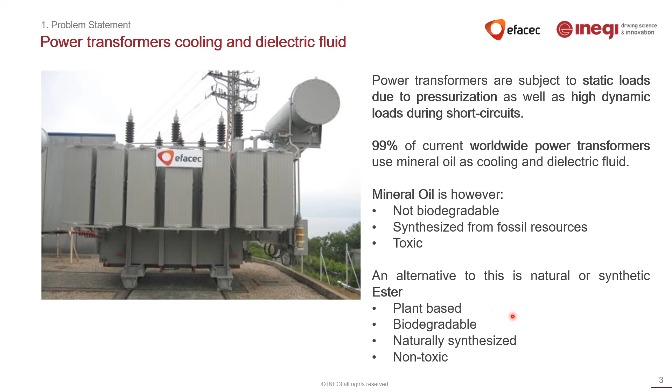So if we want to go forward to a more environmentally conscious equipment and more eco-efficient, it would be a good starting point to come up with an alternative to this dielectric and cooling fluid. And one such alternative is the natural or synthetic ester, which may be plant-based, biodegradable, and is naturally synthesized, as well as non-toxic.

Besides the environmental concern, there's also the point of view of safety, namely fire safety. Since mineral oil has a much lower flash point than natural ester, when we are employing a power transformer to a densely populated location, or even in a sensitive location, as we are aware there were this year a lot of fires in Europe and as well in the United States, California and so on, electric equipment might be an important concern going forward from the point of view of fire safety.

So by employing natural ester, since it has much higher flash points, we will also be having much safer equipment to operate in high temperatures. And as well, there's the point of view of efficiency of the transformer, since the materials when embedded in natural ester have a higher thermal class, which increases the maximum operating temperature and improves the eco-efficiency of the power transformer.

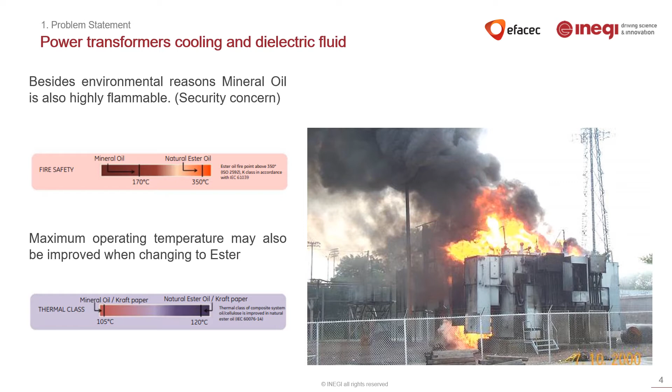So for this study, in order to study the mechanical performance of important components in the power transformer, namely the insulators, when impregnated with different fluids, we have studied a series of materials in different conditions to evaluate and compare their mechanical performance. Two classes of material were studied. One was extra hard pressboard insulators, and the other one was meta-aramid insulators, namely Nomex.

Two different thicknesses were used for the pressboard, so 2.5 and 4 millimeter nominal thickness, as well as different aging conditions. So all of these materials were either in a new condition, so with a fresh set of dielectric fluid, or aged. The aging process was done by immersing the insulators in the fluid at an elevated temperature to accelerate the aging process, and the degree of polymerization was measured.

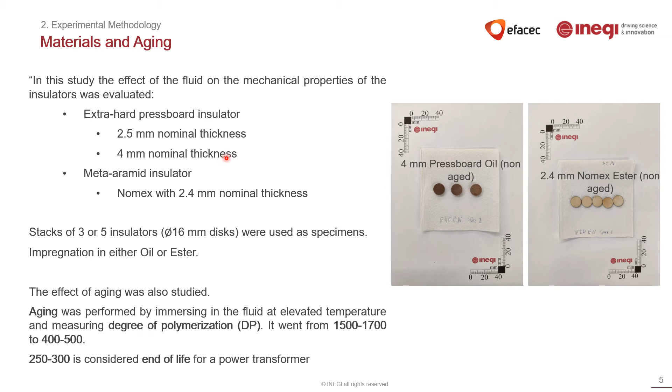The degree of polymerization went from 1500 to 1700 to about 400 or 500, and we have to take into consideration that if it reaches 250 to 300, it is considered end of life in a power transformer. The specimens that were used to test were stacks of either 3 or 5 16mm discs, depending on the nominal thickness of the specimens. These specimens were then tested according to IEC 60641-2 standard in an in-house developed testing machine. This test consists of loading in three stages.

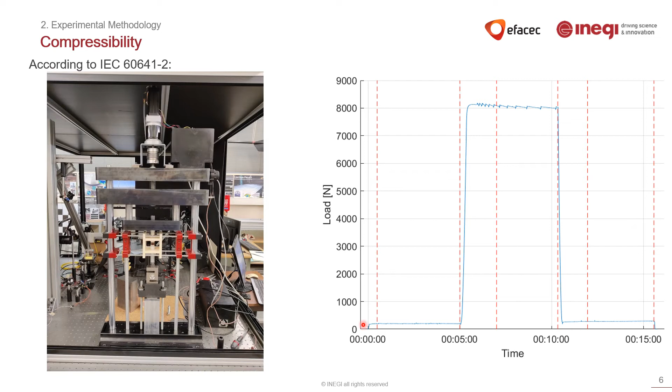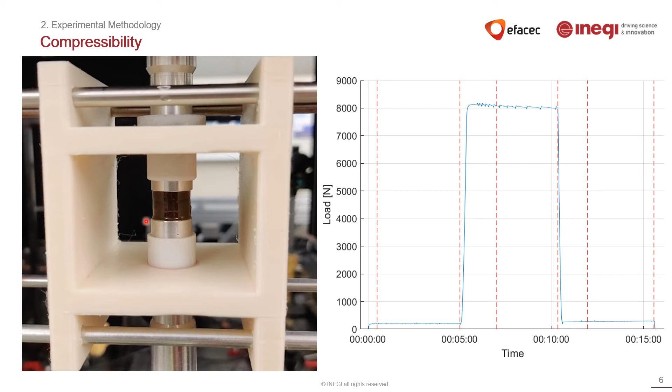It's a compressive study where during the compression of the material we do see some of the fluid expelling out. So this standard involves doing the three-step loading, as I was mentioning, where first we have an initial loading, which equates more or less to 1 megapascal. Then it's compressed at a constant rate until it reaches another loading, close to 40 megapascals, and this will equate to a specimen height of H0 and then H1, and then at the end, when decompressing to the same load level as in H0, we'll have the H2.

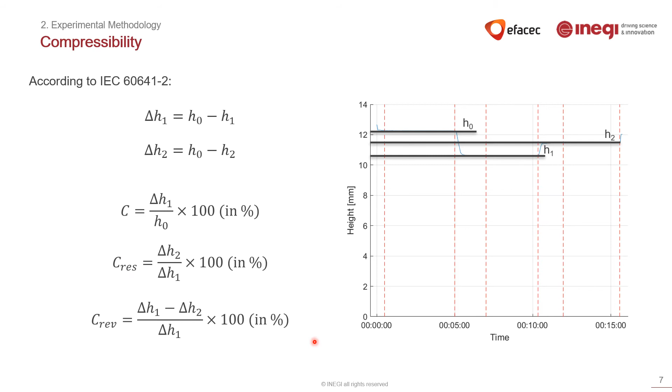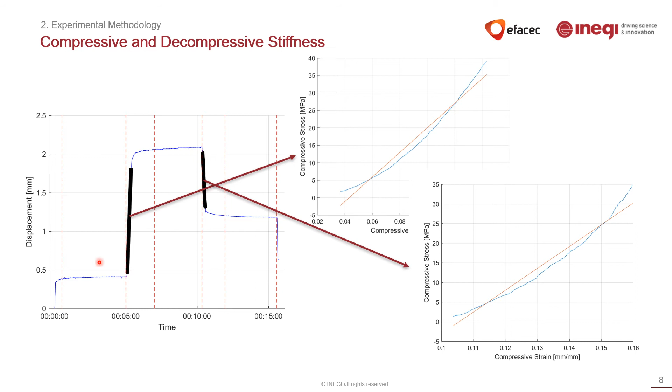And through these calculations, we can have the compressibility, in percentage of strain, let's say, the residual part of that compressibility, so the non-reversible, and the reversible part of that compressibility. Beyond the stated in the IEC standard, we can also look in these tests at the compressive and then decompressive stiffness, which is what was shown here in this calculation, and it is marked in the graphs in this black line.

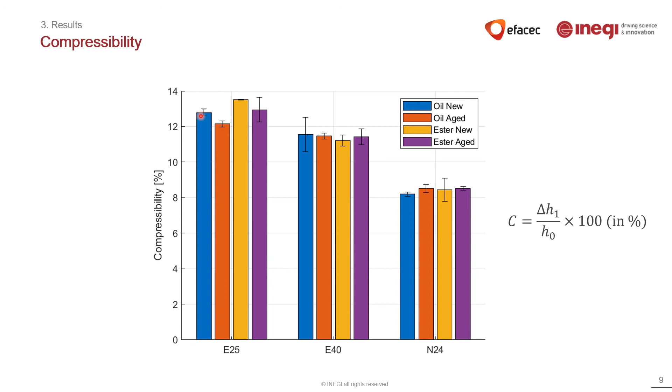So the first metric that you can look at is the compressibility, which is the difference in specimen height during this compression test. And we can see that there is no significant difference between different mediums and aging condition, only being observed differences between the materials. So the pressboard materials have higher values of compressibility than the meta-aramid insulators.

Regarding the reversible and residual part of compressibility, we can indeed see some differences between the mediums, the materials, and the aging condition. One of the first ones that we can observe is a difference between aged and non-aged mineral oil, where we can see that there is a reduction in the residual part of the compressibility. We can also see that this reduction is more prominent in pressboard than it is in the Nomex material. In the case of ester, we see less significance of the aging condition. In the case of Nomex and ester, we see a slight increase in the residual part of compressibility when the material is aged.

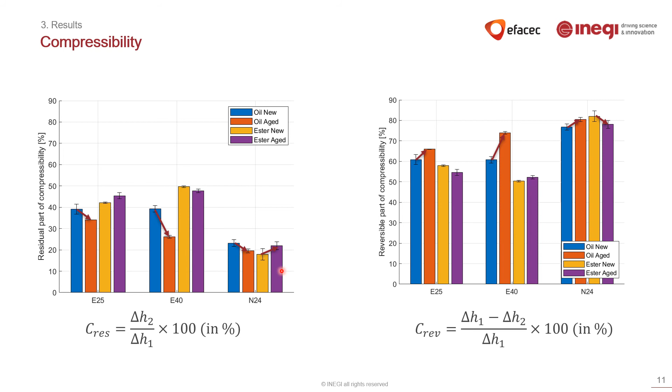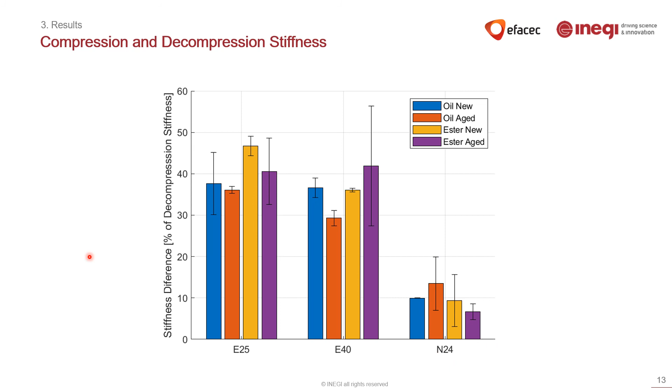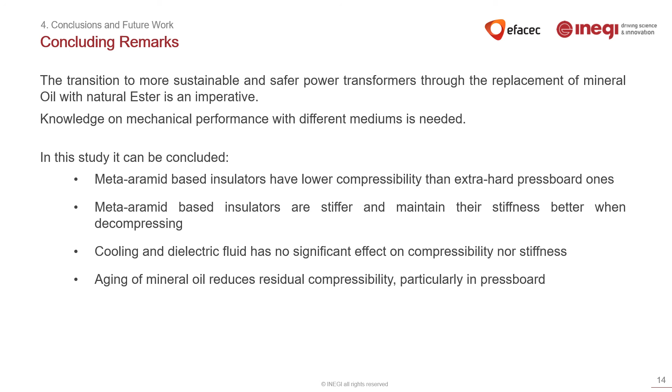So to conclude, we can state that it is indeed important to look at materials to replace mineral oil in power transformers, and that it is important to know the mechanical performance of these materials in these mediums. What we observed during this experimental campaign was that the meta-aramid based insulators have indeed lower compressibility than the extra hard pressboard insulators. That the meta-aramid based insulators are stiffer and maintain their stiffness better when decompressing, that the cooling and dielectric fluid had no significant effect on compressibility nor in stiffness, and that the aging of mineral oil reduces residual compressibility, particularly in pressboard, while the ester does not.

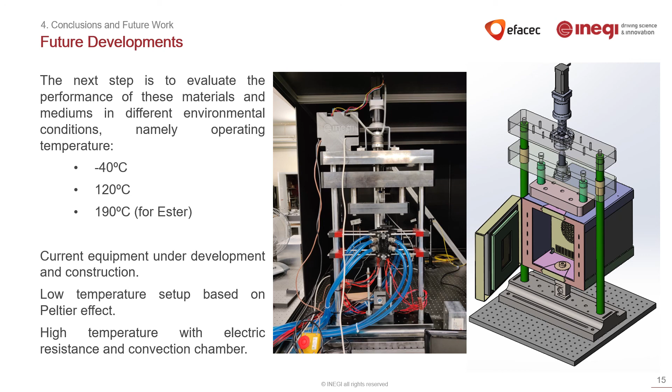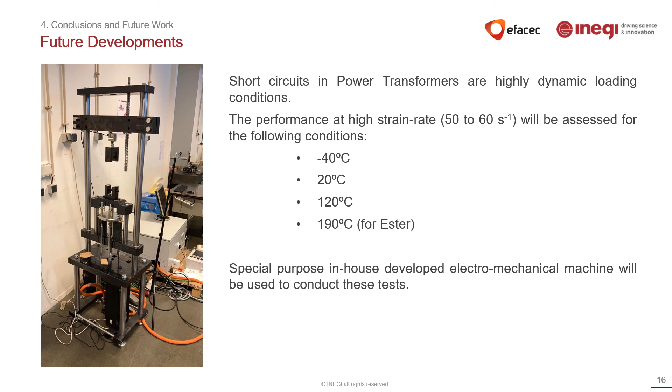So as for next steps, we need to also look at the different mechanical performance in different environment conditions, namely in terms of temperature. So we are developing equipment to test at -40, 120 degrees and 190. For -40 we'll use a Peltier-based solution, and for the other temperatures we'll use a convection chamber. We also require to study the performance in high strain condition due to the cases of short circuit loads, as I mentioned before. And we'll be doing that in a special made electromechanical machine, again at the different operating temperatures.